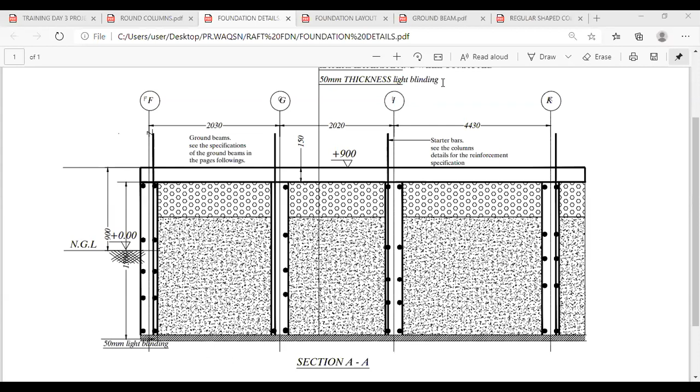Okay, yes. So this is the foundation section that shows us the details of the foundation. From here, you can see that the natural ground level is at this point. Let me highlight it. So this place I marked red is the natural ground level. So you take note of that. And the entire ground beam, this is the ground beam. If you read the details, the data I sent, the ground beam starts from here to this point. Let me use another color for the ground beam.

So the ground beam is this one that I'm marking blue, and this is the depth, which is 1.5 meters. So what we are excavating is just from this point down to this point, from here to here, which is half of 1.5. That's why you see we have 0.75 as the excavation depth. Then from this point to this point is 0.9 meters. That's the part of the foundation that is above ground level. So the part of the beam that is below ground level is half of 1.5. That's 0.75.

So that's why we have all this data in the training data required for raft foundation taking off, which I sent. The first is the site area, which is 1,724.6 square meters. The next is the ground floor area, which is 504.6 square meters. The next is the ground floor perimeter. Then the next is the bulk excavation area.

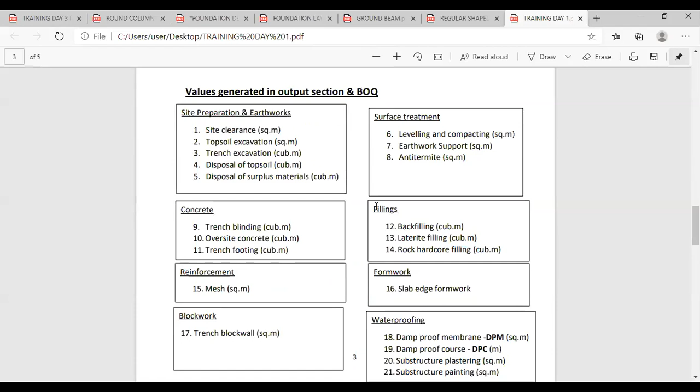So the next is the bulk excavation average girth. In this case, we don't need a trench excavation girth. You can remember our first day of training, we used the trench excavation girth. In that case, we don't divide the girth by 2, because in preparing earthwork support, the software uses the trench excavation girth times 2, then times the depth of the excavation. But in this case, we don't have trench, so we are using bulk. So when you see bulk excavation girth, you divide the perimeter by 2, because the software will still multiply this value by 2, then times the depth of excavation for earthwork support.

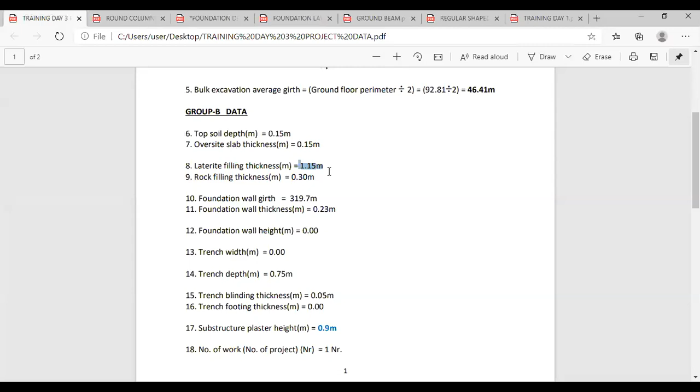Then these are all the group A data. Like I said on the first day of the training, group A data are data that we need to measure before we can extract them from the drawing, while group B data are data that we read directly from the drawing, like the topsoil excavation depth, the oversite slab thickness, the laterite filling. You can see the laterite filling here is 1.15. And if you check the foundation, this portion is the laterite, from this place down to this place. Then the rock filling is what we have at the top here. So that's why we have 1.15 for laterite filling, and the rock filling is 0.3.

Then the next is the foundation wall girth. Although we don't have block wall in the foundation, the reason why we are using this girth here is so that the software can deduct the surface area of the beam. Because in calculating laterite and rock filling, it calculates the effective compartment area, then multiplies by the thickness for laterite or the thickness for rock and hardcore. As you can see, we don't have a foundation wall height here, because the foundation wall height is supposed to be the girth times the height.

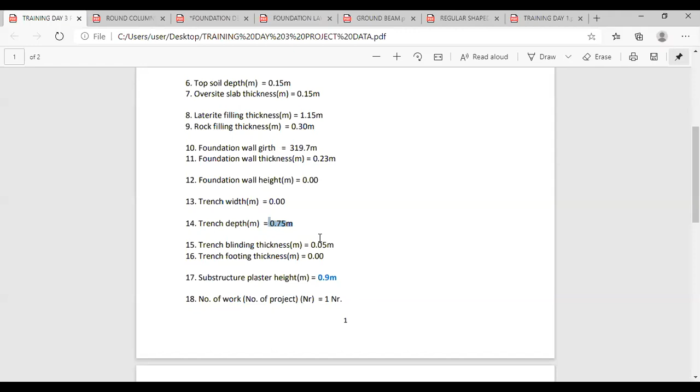So when you go to the bill, after we are done today, we are not going to have any value for block wall in foundation, because we don't have block wall in foundation in this case. So don't be confused when you see this foundation wall girth. We just provided it for deduction of the beam area in foundation to have an effective filling area. Then we don't have trench width because it's a bulk excavation, but we have an excavation depth, which is 0.75 meters. And I've explained why the ground beam is higher than the excavation depth. The ground beam protrudes above the ground level by 0.9.

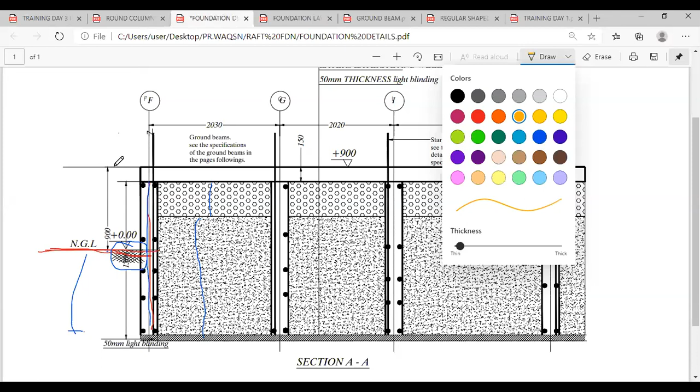Then the next is we have blinding. We don't have a trench footing. Then I also made a mistake in the substructure plaster height. So you correct this. I used 0.3 in the data I sent. So you change it to 0.9 meters, because if you check here, the portion that they will plaster is this whole surface, because this is the surface that spans above ground level.

So that's the portion that they will plaster, and that is 0.9 meters, as you can see here. So the next is the number of work, which is just 1. The next is the data required for ground beam. We need the depth of the ground beam. The depth is 1.5 meters.

The width is 0.23. Then the length of the ground beam is this, 319.7 meters. The number of beams is 1. Then the bar length, we actually increase this value by 15% to cover up for laps. You can use any percentage you wish. I'll show you how to do that. That's how we got 367.63.

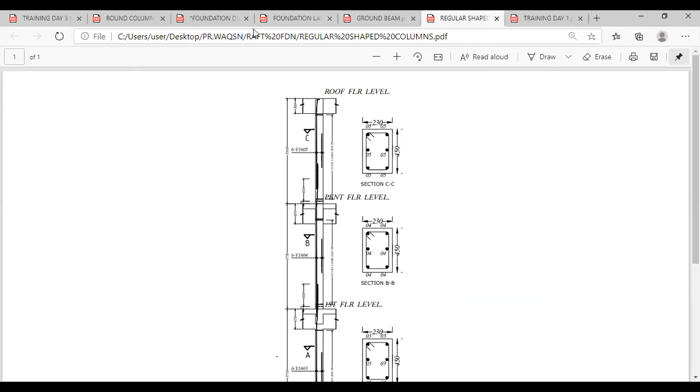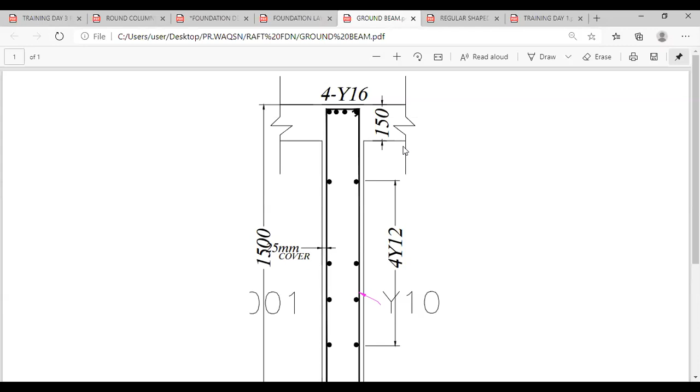Then the runners are Y12. So we have 4Y12 on the left side, 4Y12 on the right side. So that's 8Y12. Then for the stirrups, we have Y10 at 200 center to center. Then we are using 25 mm for the concrete cover. But remember, you need to convert this to meters when entering it into the software.

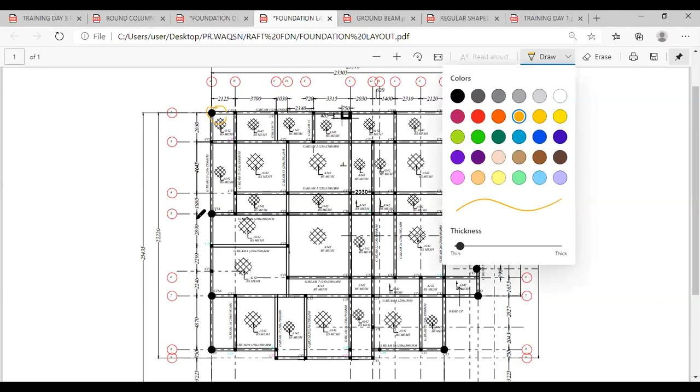Then for the columns, we have regular column, which is a square or rectangular column. We also have a round column. If you check the foundation layout, you see the column arrangement there. We have regular column. Then these are the round columns, as you can see. So we have round column here. So if you go through, you see all the round columns. Then these are the regular columns.

So if you count them, we have 52 regular columns and 10 round columns. And these are the details. The regular column, the length is 0.23, the breadth is 0.23. The height of the column, although the column is embedded in the beams, is 1.5 meters. The starter bar length is 2.78 meters.

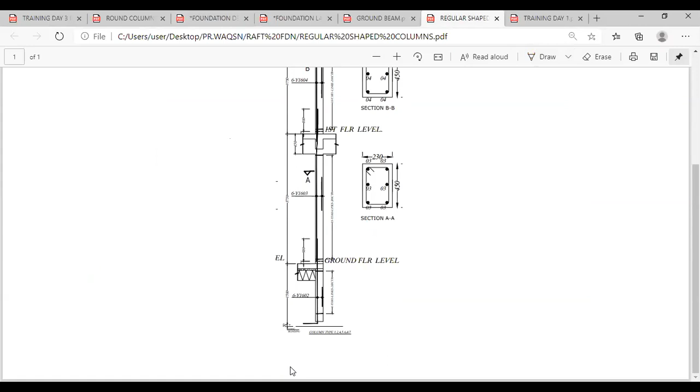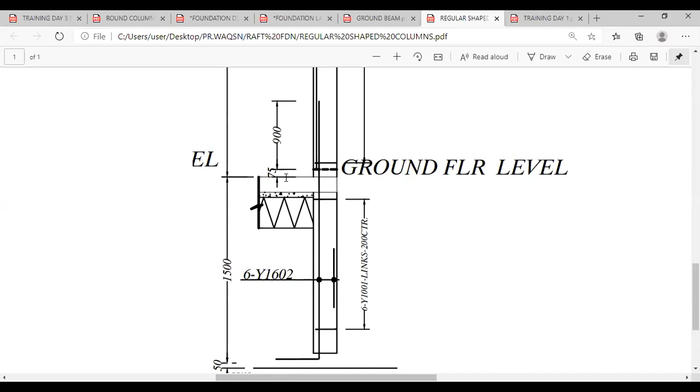And if you check the foundation section here, you see the reinforcement is spanning from here, then protrudes above the ground level, which is above the ground floor slab, which is projection. So you see the further details here. So this is how we got 2.78. We added 1.5 meters plus the bend here, then plus projection of 900 mm and the kicker of 75 mm. That's how we got 2.78 as the starter bar length.

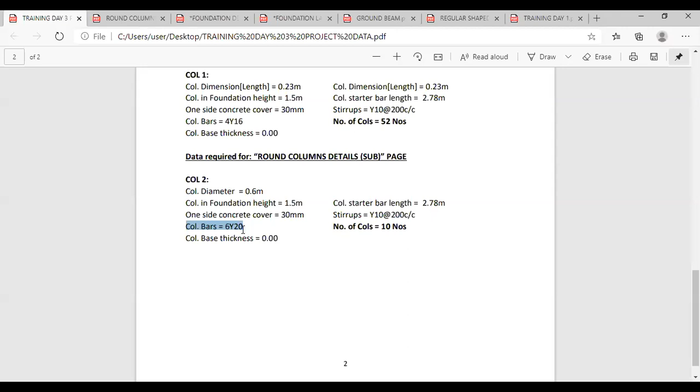Then the next is the column bar is 4Y16. We don't have column base. The number of regular columns is 52. The next we look at the round column details. The diameter of the round column is 0.6 meters. It has the same specification as the one described before. Then the reinforcement is 6Y20. See, we have Y20 here, then we have Y16 at the regular column. The number is 10.

So having done this, remember on the first day of the training, I said we go through stages in using the software. The step one is extraction of data and specification, which we have done. Step two is to input the data in required text boxes and cells. Then after that, we save each of the pages. Then we click result and the final stage, which is a BOQ. So we are heading to stage two at the moment.

So again, if you just joined, this is the category we are working on, auto takeoff and BOQ. And we are using this third item on the list, building takeoff. So when it is clicked, it opens. So when this is open now, we are going to enter the data. So first, we are entering the site area. The site area is 1724.6 square meters. So the description, you can put substructure there.

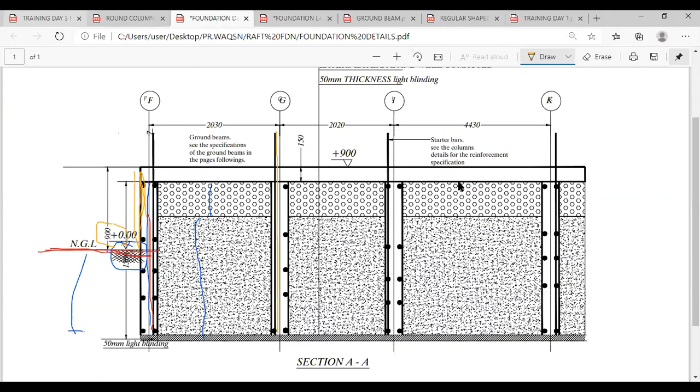Today we are working on 4 pages. We are working on the first page, which is site and trench. Then we are working on the ground beam page, that's ground beam details. The third is regular column in substructure. Then the last, which is round column in substructure. So we are done with the first page. So the next thing is to save that page now.

And in saving the page, like I said on the first day, we create a folder on our desktop. So we already created a main folder on the first day of the training, which we named e-QS 2 projects. Then inside that folder, we are creating subfolders, where we save the taking-off data for each project we are working on. The first day we worked on the community library, we saved all the data there. The second day we worked on projects with column bases, we saved the data there. So today we are going to create another folder inside that main folder.

So on the home screen or the desktop screen of your computer, you can locate this main folder, which is e-QS 2 projects. So when you open the main folder, if you have not created the folder, you can do that. There is a manual that we sent to the group also. If you read the manual, it will guide you through creating the folder and subfolders. So inside this main folder now, we create a new folder.

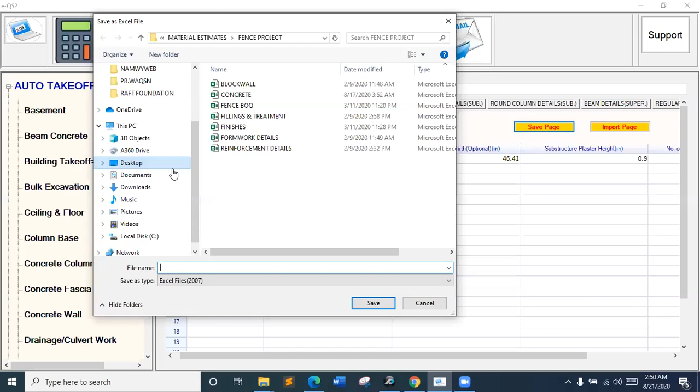I'm saving it into the project. So to locate or navigate to that folder again, you click on Desktop on the left side of your screen. It brings out all the folders on your desktop. Then you click on the main folder, which is e-QS 2 projects. Then you see the folder is empty.

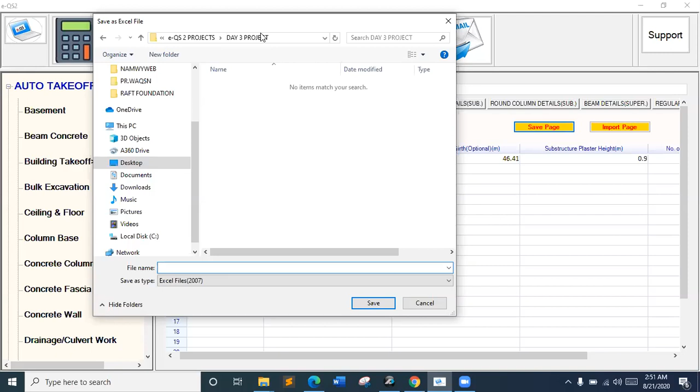So to save, you just type the file name here. And I say you save each of the pages with the title of that page. The title of this page is Site and Trench Details. So you type Site and Trench Details and you click Save.

The purpose of using the same title is so that when you want to import back, in case you want to make any correction or you want to use the data at a later date, it will be easy for you to identify the appropriate file. Because if you import a wrong file into the wrong page, you get wrong results.

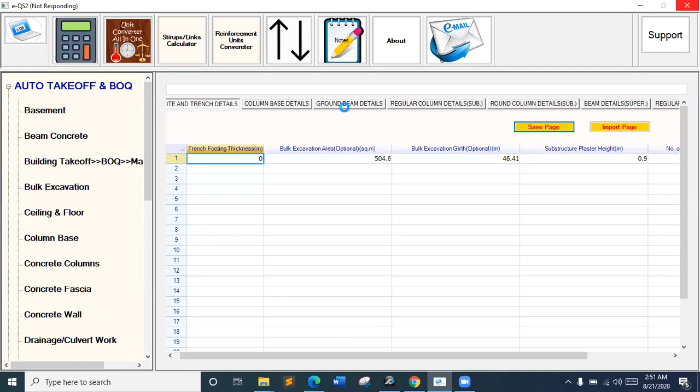So after this page is saved, we move to the next tab we are working on, which is ground beam details. So we are going to the second page now, ground beam details. And the data we need for this page are what we have gone through before.

The ground beam width is 0.23, the depth is 1.5 meters, the beam length is 319.7 meters, the number of beams is 1, the bar length is 367.63 meters. We actually increased this value by 15%. You may wish to increase yours by 20%, 15% or 10%.

We did that to make up for laps, because if you have a beam of this length, you cannot just have a reinforcement that is exactly the same length as the beam. The reinforcement is usually more than the length of the beam.

Then the reinforcement, we have 7Y16 and 8Y12. The beam bar diameter, we have Y16 and Y12. The concrete cover is 30 mm. The stirrup is Y10 at 200 mm center to center. So now we proceed to entering this data into the software. So before we do that, we click the next page we want to work on, which is the ground beam details page.

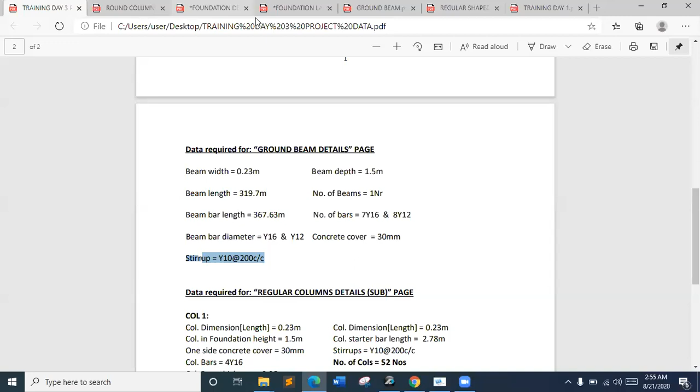So in this first row, I'm going to work on the ground beam concrete, formwork, reinforcement and stirrup. Because we have two types of reinforcement in the ground beam. We have Y16 and Y12. If you check the drawing, here, this is the ground beam section.

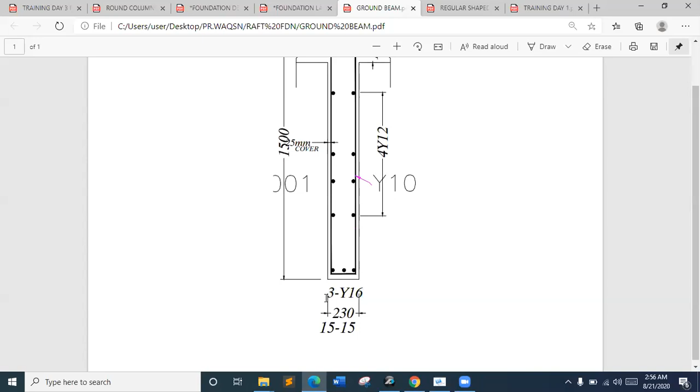We have 4 Y16 at the top. We have 3 Y16 at the bottom. They are the main bars. Then the runners are Y12. We have 4 Y12 at the left side, 4 Y12 at the right side. So that's why we have 8 Y12. And when you add 4 plus 3, that's why we have 7 Y16. And the stirrup is Y10 at 200 centers.

Okay, you see here, the concrete cover is actually 25 mm. So we are using 25 mm, not 30 mm. So you correct that as well.

So we are going to work on, we name this ground beam 1 since it's just one beam. And we are working on the concrete and the reinforcement details on the first row. On the second row, we are only going to work on the second type of reinforcement, which is Y12 reinforcement. So you go back here, you put the beam width is 0.23, the depth is 1.5,

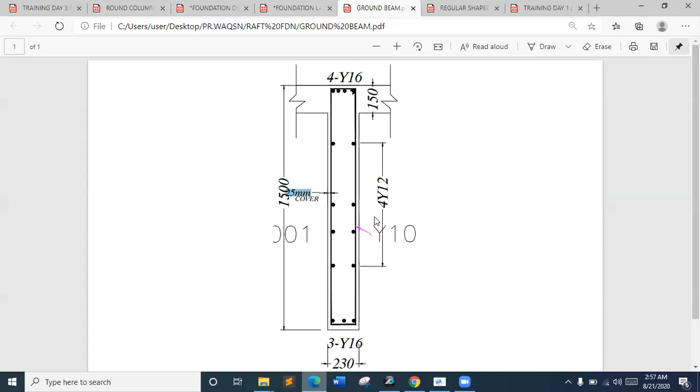the beam length is 319.7, the number of beams is 1, the beam bar length. So the reason why we got this value, if you go back to the data, why we got 367.63 as the beam bar length, is because we increased the beam length, which is 319.7, by 15% to cover up for laps. And you can use this icon, this form at the toolbar at the top.

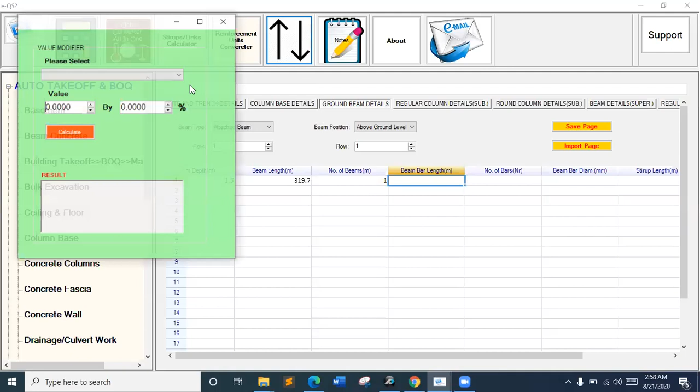This one that has 2 arrows, one pointing up, one pointing down. It's called value modifier. You can use it to increase or reduce a value by a particular percentage which you should choose. So when you click this, this comes up. This is called value modifier form. So it says please select. You click this drop down, it gives you two options, increase or reduce.

So we are increasing the beam length, which is 319.7, by a particular percent to make up for laps. So we say 319.7. Then let's say we are increasing by 15%. So that's how we got 367.655. So if you approximate, it's how we got this 367.63. So we are using 367.65 or 66 in this case. So we say 367.66.

So back to this value modifier, you can use this form when you want to increase any value, maybe rate. You may price a bill and they say the rate is too high, that you should reduce by 12% or by 8%. If you are reducing, you change this to reduce. Let's say you use 45,000 for concrete, for example, and you want to reduce by 8%. You just click this, it gives you the new value. And if you are increasing, you change this to increase. Let's say you want to increase a particular value by 9.5%. So that's the usefulness of this form.

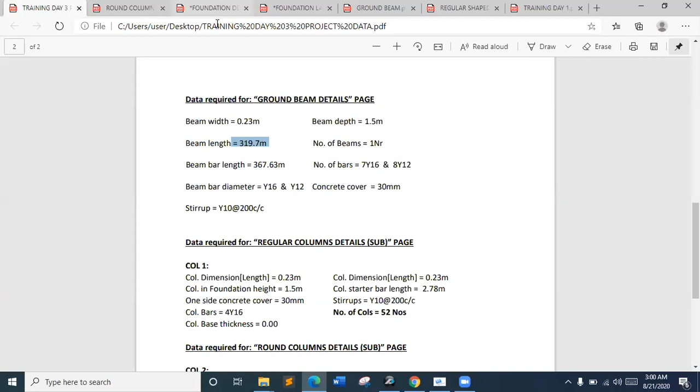So the next is stirrup length. Stirrup length, when you open the ground beam detail here, you can see the stirrup. The stirrup is Y10 and it spans through the depth of the beam, and it has a little lap here. So the beam is 230 by 1.5 meters. So we used the stirrup calculator the other day. We're also going to use that for the stirrup calculation here. So you click stirrup calculator and this comes up.

Wherever you see please select, you click to select an option. We have regular shape stirrup, which is a square or rectangular or triangular shape or round shape. So we are working on a rectangular shape, so you choose regular shape. The next is the length. The length is 1.5. Then the breadth is 0.23. The concrete cover is 25 mm. Put it in meters, which is 0.025 meters.

Then the laps, we are using 0.2 in this case. I think 0.2 will be too small because of the depth of the beam. So let's use 0.3 meters. So one side 150, the other side 150. That's why we say 2 laps. So we use 0.3 meters. This is at your own discretion. You can use whichever value you want here, but the value you are using here will affect your result.

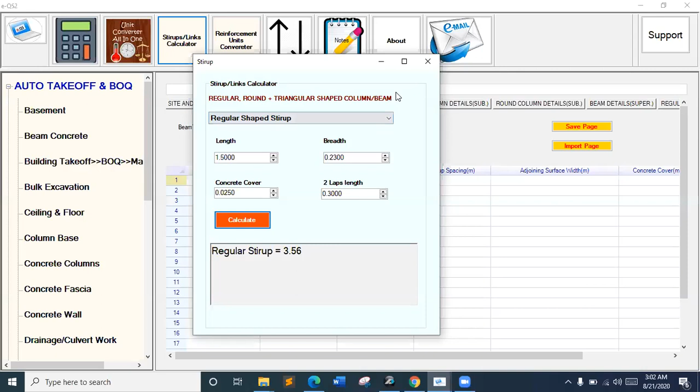So when you click calculate, you get the stirrup length, which is 3.56 meters. So you put that here, 3.56 meters. Then the next, stirrup diameter is 10 mm. You put 10 there. The stirrup spacing is 0.2. Then the adjoining surface width.

The meaning of this is, we said earlier on that the beam is resting on the ground. It's resting on the blinded surface. The surface of the beam that is touching the ground is 0.23. So that's the meaning of adjoining surface. Then the next is concrete cover, which is 0.025 meters.

So with this, we have output for the beam concrete volume, the formwork to the 2 sides of the beam. If I should change this now to isolated, you see the results for the formwork have changed. In isolated, it's calculating for 3 sides of the beam, the left and right side and the surface, but we are using attached in this case.

So the next is reinforcement. Note that this reinforcement for the first row is Y16. This is the reinforcement in meters, in kg, and in tons. Then the next is the stirrup. Stirrup in meters, in kg, in tons. So we are done for the beam concrete, formwork and Y16 reinforcement.

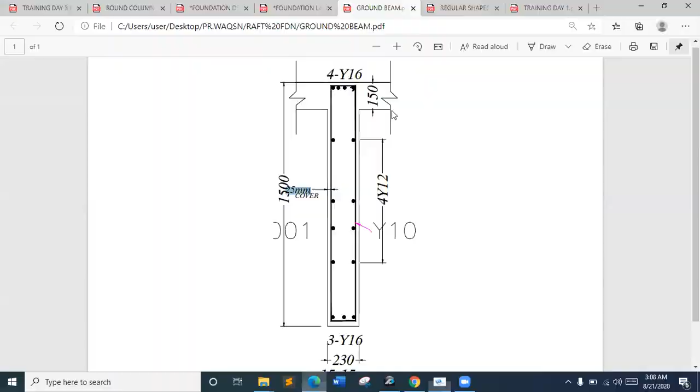So when it's finished saving, we move to the 3rd page we are working on, which is regular column details. So far we have worked on the 1st page, which is this. We worked on this page and we saved it. We worked on the 2nd page. We are heading on to the 3rd page, which is regular column details in substructure.

And these are the data we need for the regular column details: the column length, breadth, the column in foundation height, starter bar length, the concrete cover, and other stirrup details, which is Y10 at 200, and so on and so forth. The number of columns here is 52. Okay, I'm going to click this regular column details page.

The reason why regular column is separated from round column is because in regular column you need length and breadth, but in round column you need diameter. And even the formwork can be made of different materials, and they may have different rates. So in the bill, it's also separated there.

So the regular column, we name it column 1. And the column is isolated because we are going to provide formwork to the 4 sides of the column. So let's choose isolated. Then the column length is 0.23, the breadth is 0.45. Then the next is number of columns. Column number is 52. Number of bars, 6. Bar diameter, 16. That's Y16. The next is stirrup diameter is 10.

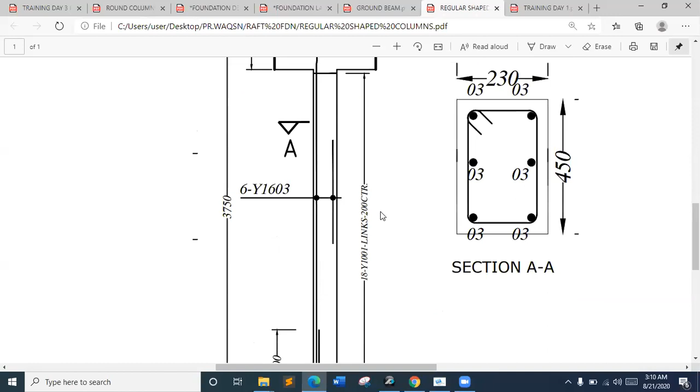That's Y10. Stirrup length is, if we go back and check, yes, we are using 30 mm as the concrete cover. So we can use this stirrup calculator that we used earlier on. When you click this stirrup calculator, this comes up. We want to use this to calculate the length of 1 stirrup. When you provide the length of 1 stirrup, the software will calculate the total number of stirrups from the height or length that you provide.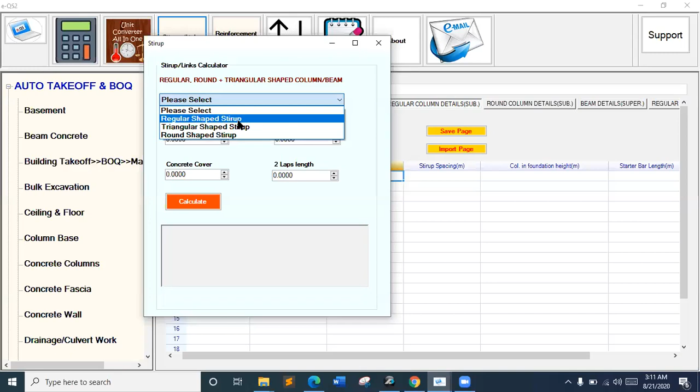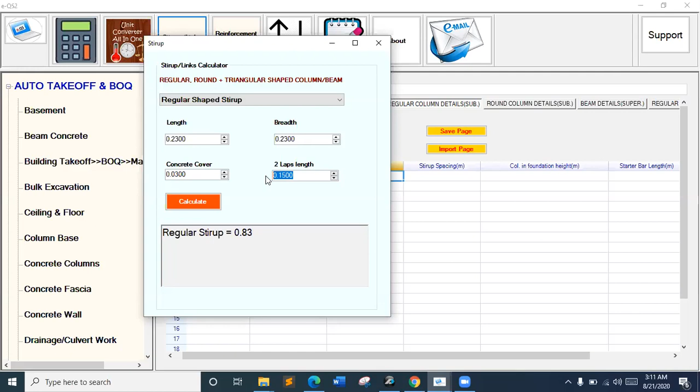So we are choosing regular shaped stirrup. The length is 0.23, the breadth is 0.23, the concrete cover is 0.03. The laps, we can use 0.2 or 0.15 or whatever you want to use. This is at your own discretion, but the value used here affects your result. You see, I'm using 0.2 here, my result is 0.88. If I change it to 0.15, the result has changed to 0.83. So you should take note of that. So we are using 0.88 as our single stirrup length. The spacing is 0.2.

Then the column in foundation height, from what we have here, you see the entire height of the ground beam is 1.5, which also represents the height of the column. But let's go to the details here to have a better view of it. The 1.5 is from the bottom here to here, and we have beams here also with the columns. Then you have stirrups spanning through. Sorry, from the data extraction, the column in foundation height is 1.5, not 1.2. So that's why we are using 1.5.

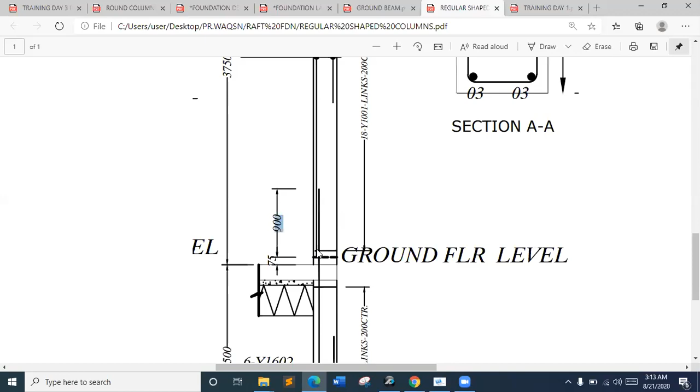The next is the starter bar length. The starter bar is usually more than the column in foundation height. The starter bar has a bend. It also projects above the ground floor slab, which is called projection. If you check the detail we have here, we have 900 projection plus 75 mm plus 1.5, then plus bend. That's how we got this 2.78 meters. So we are using 2.78 meters here.

Then column base thickness is 0 because we don't have a column base in this case. Adjoining wall thickness: the column is not attached to any wall, so you put 0 there so that the formwork will be calculated on the 4 sides of the column. So from here we have column concrete volume, formwork, and reinforcement in meters and in kg. We also have the stirrups here in meters and in kg.

In this case, we have 2 types of reinforcement in the columns. In the round column, we have Y20. In the regular columns, we have Y16. So the software will sum up the total reinforcement in kg for both round and regular. So if you are interested in separating the reinforcement as Y16 and Y20, then you need to write this out and record it on your paper.

Then before we proceed, we click Save Page. Then we give it the same name, which is regular column details substructure. Then you click Save. After this, we move to the next tab, which is round column details substructure.

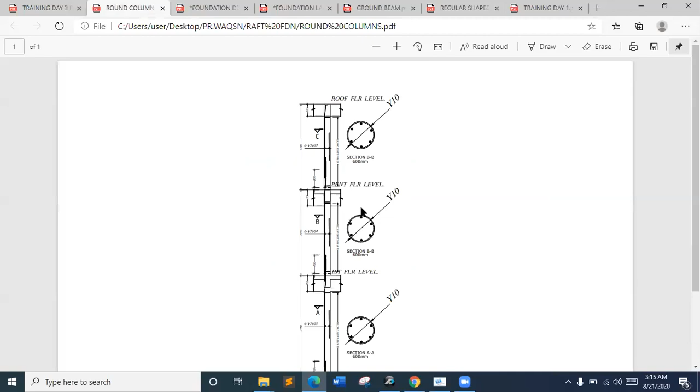The data we need for the round column details is similar to what we just did, only that we don't need column length and breadth, we need diameter. The diameter from the drawing is given as 0.6 meters, that's 600 mm. And the number of bars, as you can see, is 6. And here, see, 6Y20. So to go to that page, you click round column details.

So we are going to name this column 2, round column, column 2. The next is the diameter, which is 0.6; although it's in mm on the drawing, you change it to meters because you see it's in meters here. The number is 10. Number of bars, 6 bars. Diameter of the bars are Y20. Then the stirrup diameter is Y10.

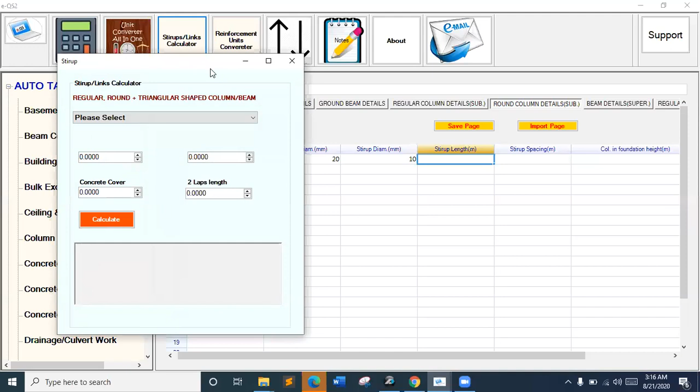So the stirrup length, we can also use the stirrup calculator to calculate the single stirrup length. Remember, the software will calculate the number of stirrups and multiply by the stirrup length, which you are going to provide here. So to use the stirrup form, you click stirrup calculator. In this case, we are using the last option in the drop down, which is round shaped stirrup. Provide the diameter, 0.6.

Then this cell here does not have any title on the heading, so you leave it blank. We don't need it. You see, when you change this to regular, we have length, breadth, but when you change this to round, you only need diameter. That's why we don't need this. So the next is the concrete cover, which is 0.03. The next is the laps, which is 0.2.

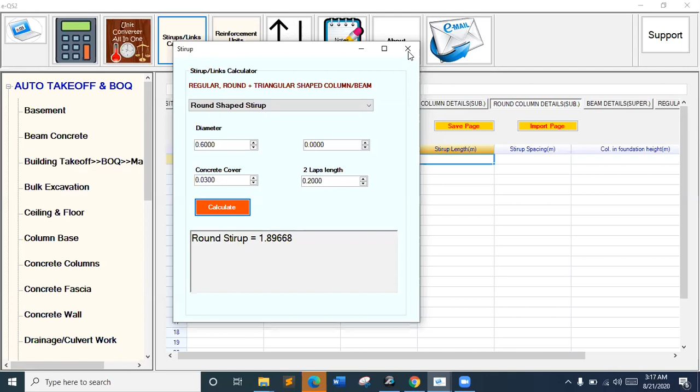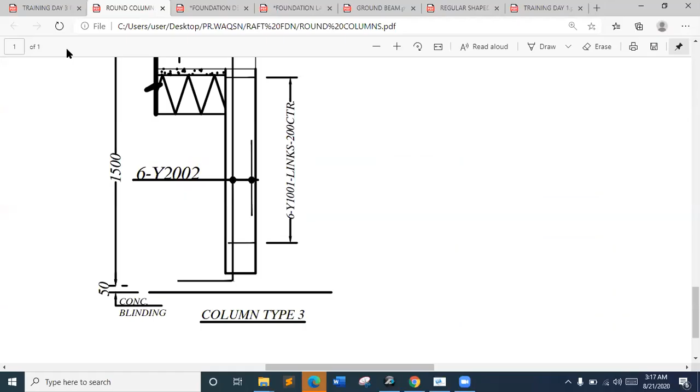Then after that, you click calculate. Then here we can approximate this value to 1.9 meters and use same. So this value is for a single stirrup. The software will calculate the number of stirrups and multiply by this to give you the total length of the stirrup. The spacing is 0.2 and the column in foundation height is 1.5 meters. The starter bar length is same as column 1, which is 2.78 meters as we have here. Then the thickness is 0.

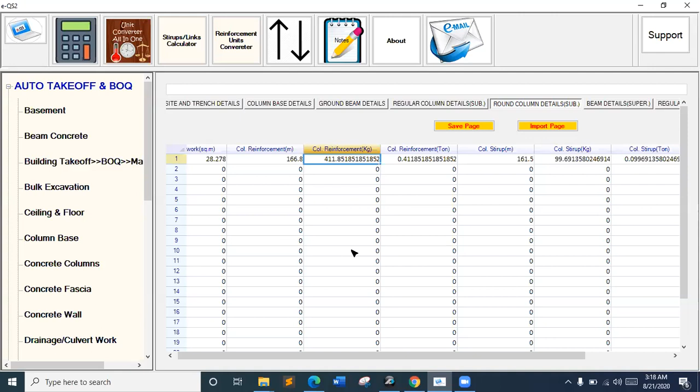After this, we have the results for the round column, the concrete, formwork, and reinforcement. Remember, this reinforcement is Y20. In the bill, the reinforcement is given in range, you see Y12 to Y20 in columns. So you can write this out, then when you get to the bill, you can make necessary adjustment there. Then the starter for the round column and the regular column will be added together before the software sends it to the BOQ.

Then after you've checked all this, this is also very important. Before you click save page, you should go through your input cells, what you have inputted, because you may make a mistake. For example, you can put 6 here instead of 0.6, and you get an outrageous figure. So you should be very careful. After each page you work on, you need to go through the values that you have inputted before you click save.

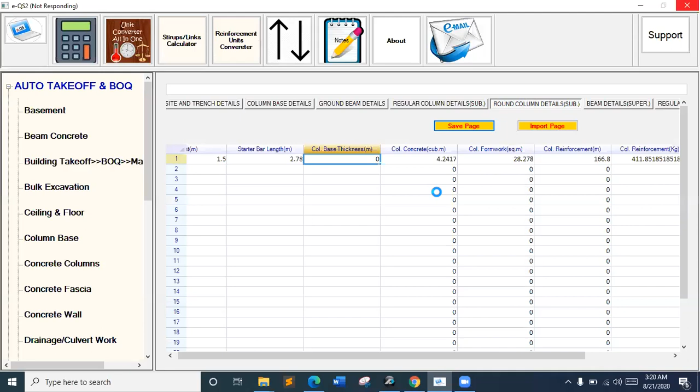So when you click save, you give it the same name, which is round column details substructure. And when you've done that, you click save. Remember I said the reason why I'm still saving it in the same folder is because I've checked the file path and it's giving me the correct file path. So once you have done this, we are done with the taking off for this project for substructure.

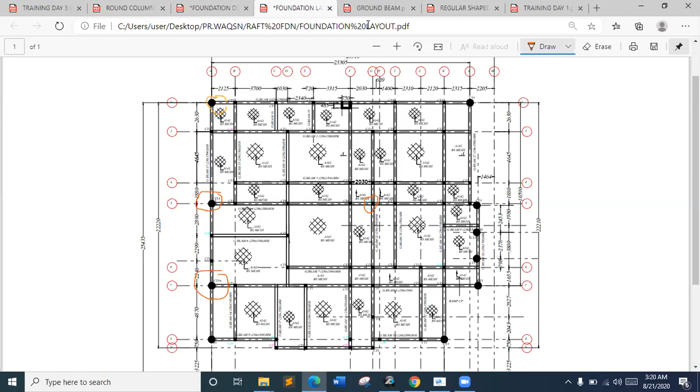So after all, we've done step 1, which is to extract the data. Step 2 to input the data. Step 3 to save the pages. Step 4 now is to go to the result. To go to the result, you go down on the page. You see this horizontal scroller, you drag it to the right. Then the vertical one, you drag it to the top. Then you can see these 2 small arrows. Click the one pointing right.

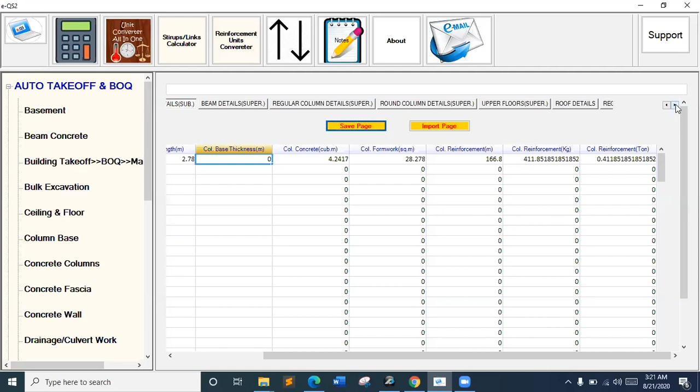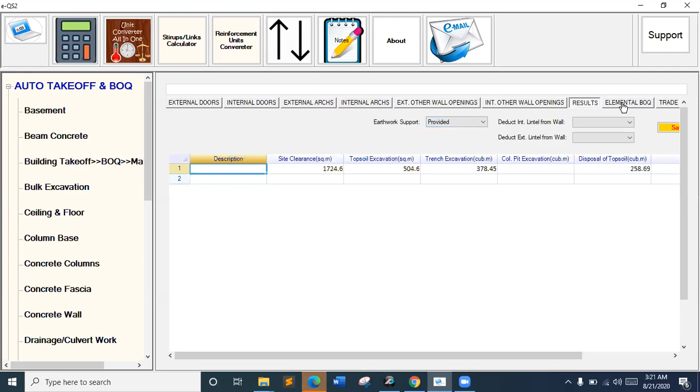You keep clicking it. As you are clicking, you are seeing some other tabs or pages associated with superstructural elements. Since we are concentrating on substructure now, we are leaving out the other tabs and heading to the result. You keep clicking till you get to the result. When you get there, you click results. Then you click earthwork support provided. That's the only change you make here. Then you click Elemental BOQ.

So with this, we have the BOQ. When you preview the BOQ, you can click Save BOQ. You can save as an Excel file, then you make necessary adjustments to the description or anything you want to change there. So you can name it BOQ substructure for day 3, and we can open it as an Excel file.

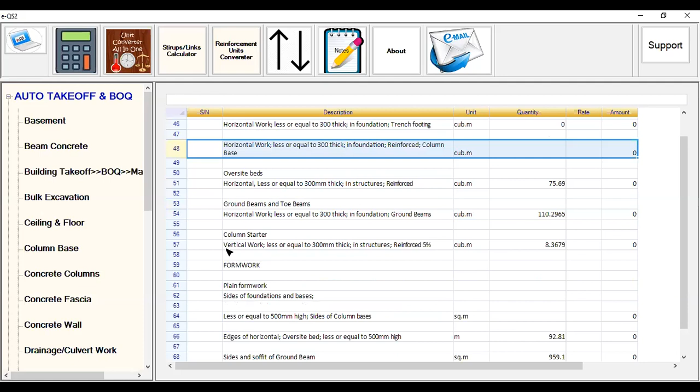But we have oversite slab concrete. Then we have ground beam concrete. We also have column starter concrete. That's concrete in foundation. Then at formwork, we don't have formwork to sides of column bases because we don't have column bases. We have formwork to edges of ground floor slab. We have formwork to sides or faces of ground beam. We have formwork to columns.

Although the columns are embedded in the beams, in some cases, depending on the construction method, the construction method requires the columns to be cast first. That's when you need this formwork to columns. Same for the round column. Like I said earlier on, the material for round column formwork may be different from what you want to use for regular column formwork. That's why the formwork quantities for round and regular are separated.

So we also have reinforcement. We have reinforcement in ground. Reinforcement in column bases is 0 because we don't have column bases. Reinforcement in ground beam. This is what I was saying earlier on. The software has given you a range of reinforcement. So I mentioned that you should record it when you were saving those pages which you worked on. Record the Y16 and Y20 if you don't want a summed up result as we have here. If you did that earlier on, you can make the necessary adjustments in the Excel version that you have saved, which we are still going to open.

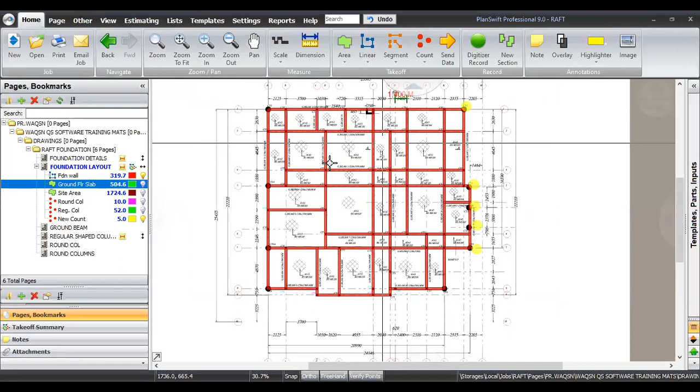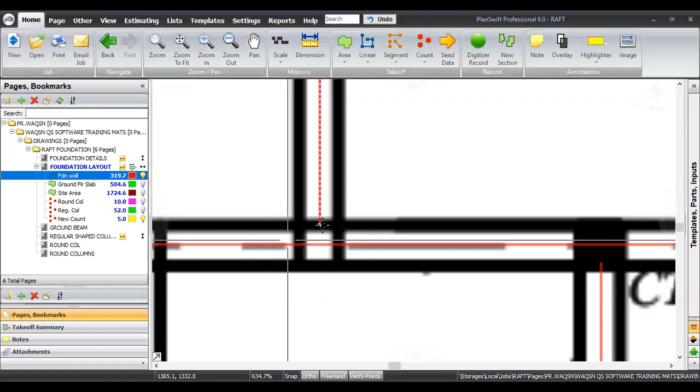So about the T junction, this is a T junction we have here. This line stops before this T. If you are doing this manually, it's easy to just take the entire length up to this point. But because we are using this software, we had to stop here. This is a T junction and the cross in this case.

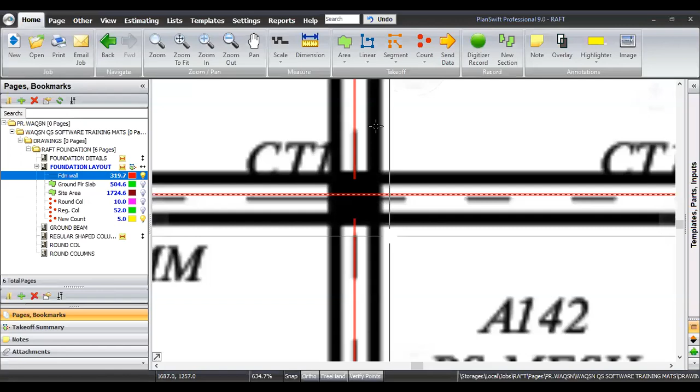The cross has a vertical and a horizontal line. In taking the GAT here, we took the horizontal line straight, but the vertical line we stopped right at this column. It does not touch the 230 mm wall, so the 230 mm wall is considered. That's how we took care of the T and L. I hope this answers your question, sir. In a way, but not completely.

In the example you just showed, you stopped the vertical line at the point of joining the horizontal line. But the horizontal line was considered straight, meaning you took the total beam length for that horizontal beam. Therefore, if there's any column at that point and we take the concrete volume for that column again, there is over measurement, because the beam was considered as a complete length. Are you with me, sir?

You are right. Let me make this clear that you should not use the same method I used; the software is flexible and open for adjustment. You just pointed out a mistake I made in measuring the GAT, although I did it that way because I thought it's negligible. If you want to be detailed, the cell for the beam length is open, so you measure the GAT accurately and key in the accurate value. I can also do it the way you rightly suggested.

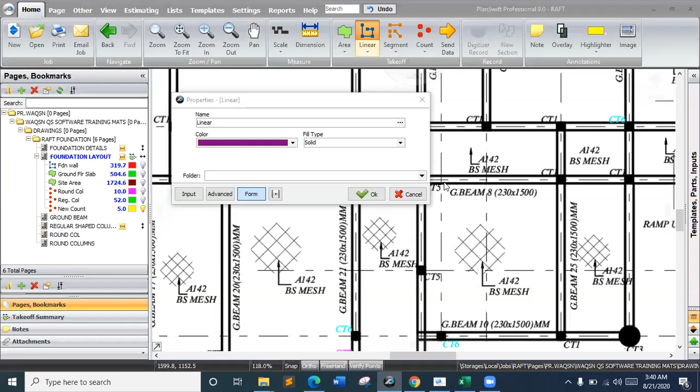Then your floor level is 900 mm above ground level. Why? So all these are things that we can see. We are cost experts. All these are things that we can criticize because at the end of the day, the client will say, but we have a cost expert on this project. Why did we have all this? So this example is just for practical demonstration of what we want to teach you on this software. But if you were given a project as a qualified quantity surveyor, you should ask questions.

We are free. That is why you have to know a little about other professions. For instance, as quantity surveyors, you may have done structural engineering as a course. Now, do you apply this on your projects? If you apply this on your project, you will have a lot of cost saving. Now, why are we talking about this? There are other countries where maybe the cost of cement and reinforcement is low, but here, look at the price of reinforcement and cement in relation to the overall cost. So for things that should reduce costs, we have to study our drawings carefully and take them up before we even do our measurements and go to site.

Thank you very much. Thank you so much, Doctor. I believe Mr. Akin Sengi has... So in conclusion, you can go on.

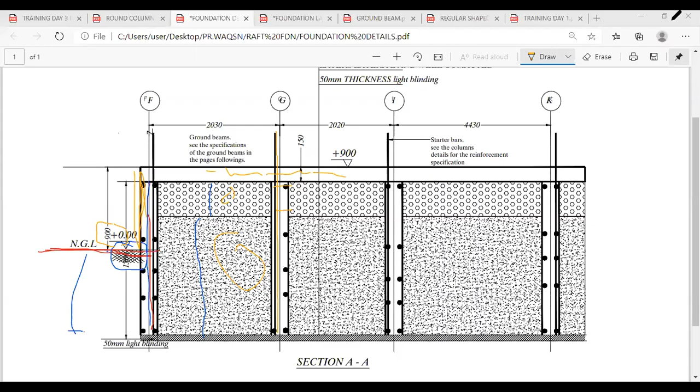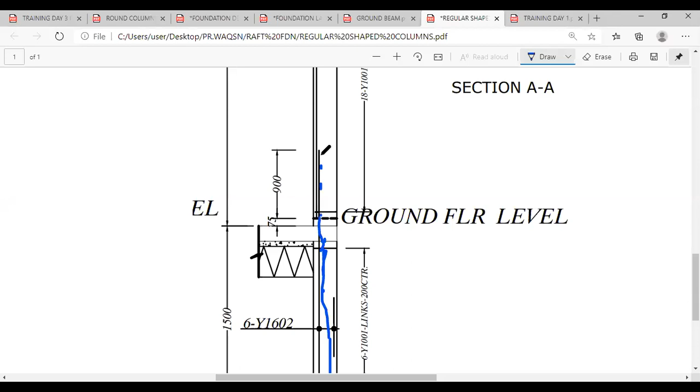The starter bar is starting from here, which is the bend. We use 0.3 as the bend. Then you add it plus 1.5, which is the one going up here. Then you add this 1.5 plus the kicker, which is 75 mm, then plus 900 mm. That's how we got the entire length of the starter bar. The starter bar in substructure is usually more than the height of the column itself because of this bend and projection.

Let me also add something. During the lecture, he said the starter bar length is 2.7 something. In practice, you don't use 2.7 something. You will use about 3 meters, because if you use 2.7 something, there will be a lot of offcuts, which will result in waste. So you want to use a round figure of 3 meters so that you can cut the bar into four lengths, because 3 times 4 is 12 meters.

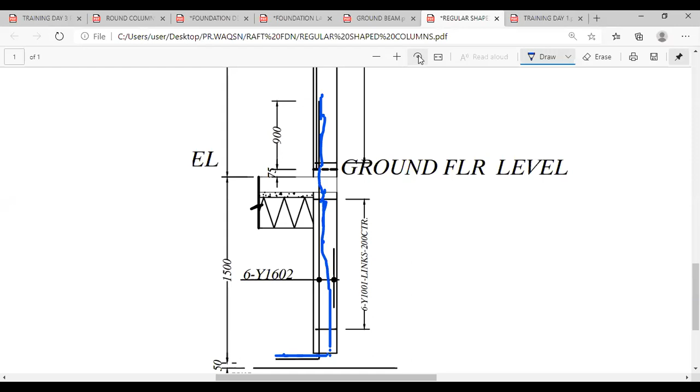Thank you. Okay, sir. Then some people are complaining that on the round column details, instead of the 1.9, it's showing as a date. I think two people had that complaint. So they want to know how to correct the column appearing as a date, as in 1st of September 2020, in the round column details.

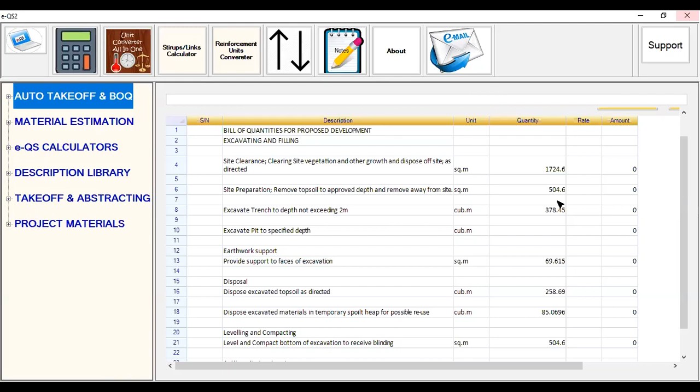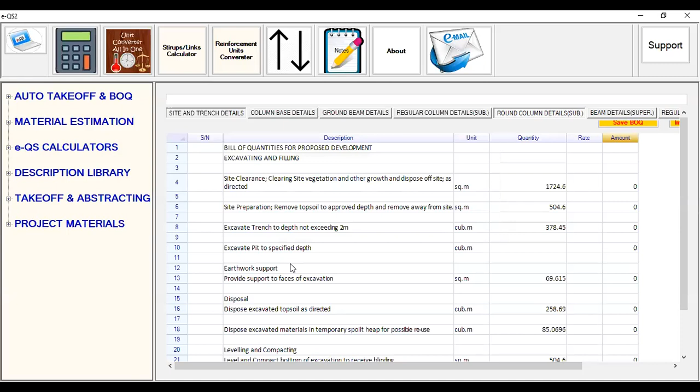The error they are getting is maybe they made a mistake when typing in the value. If you mistakenly clicked slash instead of dot, let's say you want to type 0.6 and you put 0/6, it changes to a date. So what you do is close the application, then load it again. Let me quickly show you. Let's say, for example, here, instead of 0.6, you use 0/6. If it's showing you dates, you need to close and reopen.

Okay. You've answered that. It's okay. Yes. So when you reopen, you import the page back. I just want to show you how to import the previous pages that you've worked on. The round column is actually the third page you worked on.

So you need to import the first page, which is site and trench. If you want to import, you click this import, this comes up, then you locate the file, you just double click, or you select and click open. So it will import this page. Then you do the same for the ground beam details. Your screen sharing is not showing.

Okay, I said to import the pages, you click import. Then when you click import, you select each of the previous pages that you've worked on. Then it will load the page back, because when you close it, all the work that you did previously will not appear when you open it afresh. But since you have already saved them, you just import them back so that at the end you have the accumulated result of all the pages you've worked on.